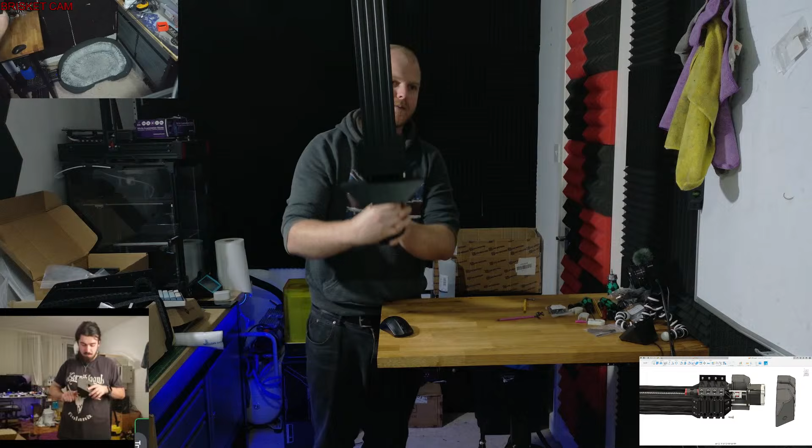And just like that, it's gone from looking like Thor's hammer to looking like a really chunky version of the Master Sword from Zelda. On guard.

The spring steel sheet beneath the P1 on powder coated plates. Yeah, so it's reading the actual powder coat rather than reading the spring steel underneath it. Okay, I get what you mean now.

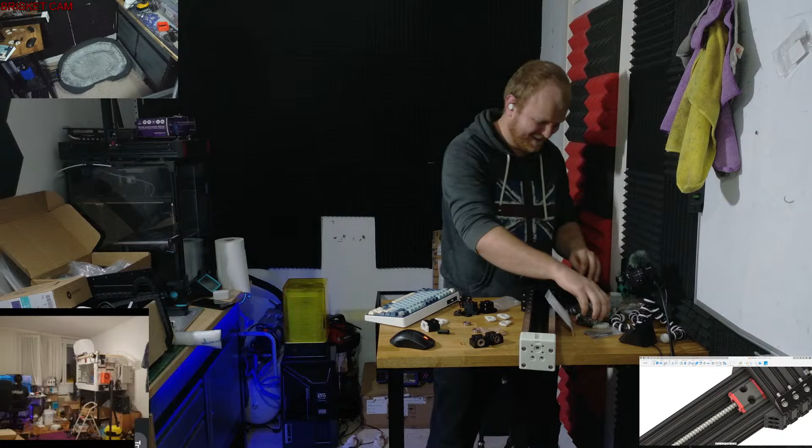Yeah, one second over there. Oh my god, Hans. Oh my god. Preparation—I told people, yeah, I mean, I did preheat my P1 just because I knew I forgot something, you know. It's alright.

It just means you're gonna have to create your own YouTube channel at some stage, just to catch everyone up on the bits that you missed. M3 by 40s, M3 by 40s. To be fair, I do have a YouTube channel I'm not really using at this point, because when you reached out to me and were testing the name, I was uploading it to my own channel—I was like, let me put it on YouTube too.

Does whipping occur on the ball screws or only on lead screws? Whipping, I think he means whipping. It can occur on both. Ball screws more likely, because you have to spin the 0802s faster to get the same feed rate, so there's more likelihood of them causing a bunch of whip. But if you really want to haul ass on lead screws, it'll do the same thing. It's more about the RPM of the screw rather than the total feed rate.

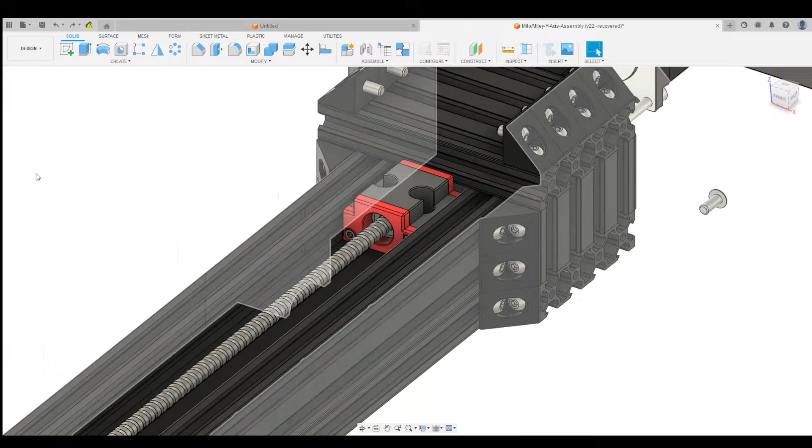What do we need? I forget what's... maybe let's open, let me just have a look at the CAD. I know we're gonna need the little M3 pins, I know we're gonna need some M3 by 10s. I got a kit too. Where is it? Where's the XY assembly? There we go.

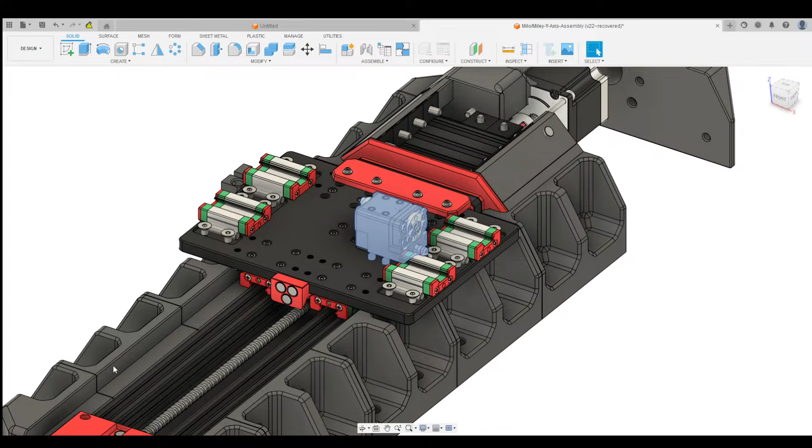Thread block. Okay, so we need the M5 by 15mm pin, the M3 pins, M5.

Where are the M3 pins? Where did I put the M3 pins? I had them earlier.

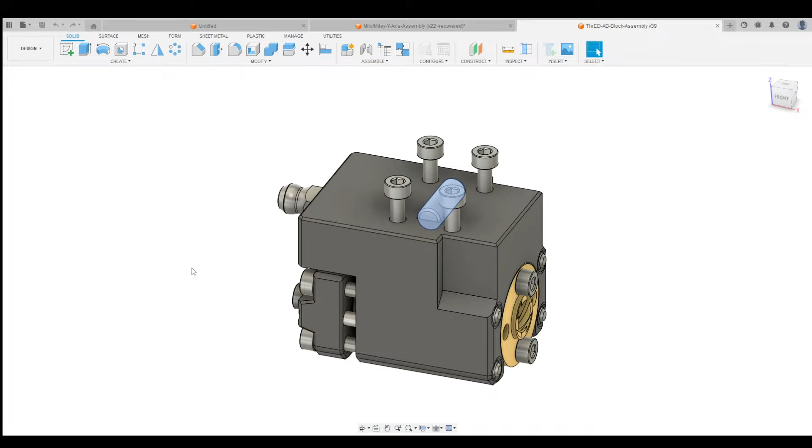Oh, as all my streams go, it just descends into me looking for things that I had earlier. I'm not the only one losing stuff. Yeah, I'm losing them. Yours didn't exist to begin with. I mean, to be fair, I remember some of them in that box. I just couldn't find them now.

Right. We'll need the grease nipples. I might as well install them if I've got them, even if I'm not going to use them.

We're going to need... now, these washers aren't really the same ones that I spec'd, so I'm going to have to see if they work out the same. I think they'll be fine, but I just don't know yet. These Amazon washers. Yeah, the washers.

So the spring-loaded washers, need those. The problem is that these are wave washers, and if you line them up in a certain way, they cancel each other out. So hopefully, basically, you're only using one really thick version of these rather than having two. The Belleville washers that I have are almost conical, they're just really stubby cones. So no matter what direction you orient them in, those will always give you the same spring pressure, whereas these ones, they're not always.

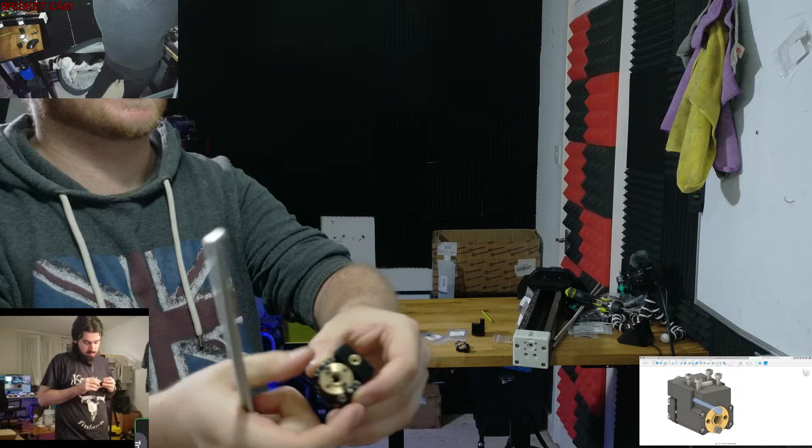Are we all set on your side, Hans? Yeah. Awesome. So the idea for these compression plates is the 4 screws we have on this side are temporary. We're going to take those out and use them to fasten these blocks down later on. For now, we're going to thread our rod in, and you should always have these greased beforehand. I'm not doing that right now because I'm just showing them off. And we're going to do this in an X pattern.

So if you start at one corner, you then go to the opposite corner, and loosen each bolt off slightly, just a half turn or a quarter turn, until the entire lead screw starts to go into both of the brass nuts. Sometimes this is easier to do with a drill. Sometimes you need to modify how many washers you're using, or spin the brass nuts 90 degrees. It can be a bit of a pain, but just be patient and you'll get there. So we're loosening it up slowly, slowly, slowly.

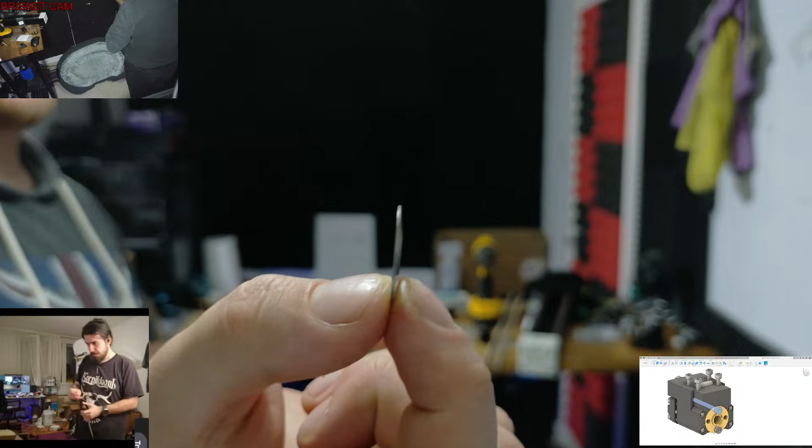This is a conical washer, right? You can see that it doesn't sit flat, it comes to a cone. That's the spec that we gave LDO. These are the ones that came with the LDO kit, these are wave washers, so you can see how there's a little wave in them.

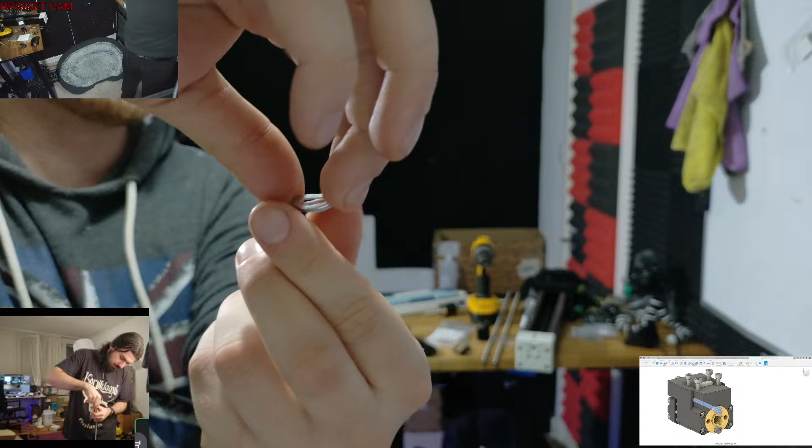Now if you take two conical washers and press them against each other, no matter what direction they go in, there's a little space that goes in between, and that acts as a spring. If you try and do that with wave washers, the two waves try and meet each other, and they index up against each other, they don't do anything, they don't add to each other. If you flip them over, the same thing occurs, they index against each other and then they don't work.

So I'll give them a try. I'm trying with them, but they're not the right thing that we asked for. They marry up, yeah.

In the V2 BOM, it mentioned to get ball screws without machined ends. That's just so they're cross-compatible with the 8mm lead screws, which don't have any machined ends. Also, you don't tend to find very many ball screws that are 8mm diameter that do have machined ends.

Yeah Jose, I'll try, I'm giving these a good shot, alright? But if they don't work, I'm gonna have to put this kit build on hold for a bit until LDO can send me some. I need to make sure, because these are really important - these are what make these anti-backlash nuts work. If these aren't proper, I'm gonna have to reject the kit.